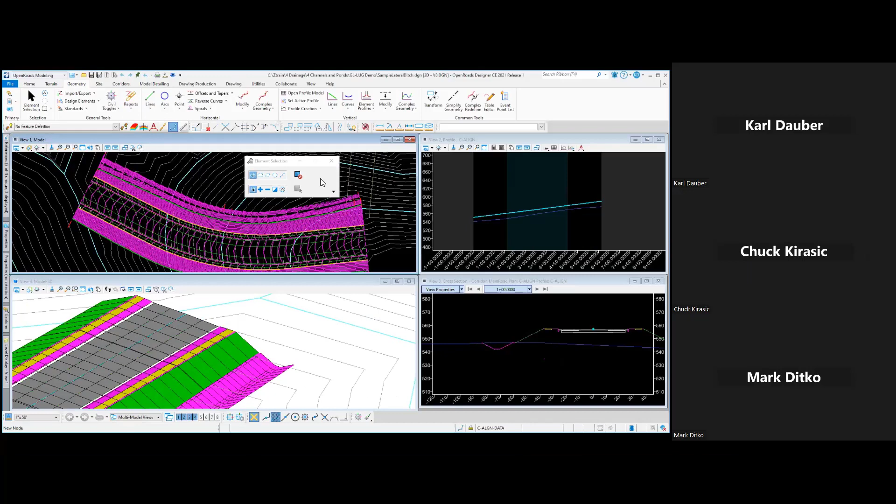And... all right. You see my screen, Chuck? Yes. All right, excellent. All right, I'm going to dive in.

Ditch design, ditch modeling is a big topic. There are a lot of different kinds of ditches and a lot of ditch issues when it comes to modeling. For example, ditch intersection modeling is not something I'm going to be covering at all today. So we're going to look at one specific, although very common type of ditch. I want to refer to these as lateral ditches, ditches that run alongside a roadway fill slope.

And so naturally, these lateral ditches have a relationship with the roadway. And what often happens is the roadway design changes, and then you have to redo your ditch design, and that's frustrating and very time consuming and expensive. And one of the things that we want to leverage in OpenRoads is the ability to develop dependencies or ruled relationships between different civil features.

So for example, we want to create a ditch that has a ruled relationship to the fill slope line, the toe of fill slope for this road, such that when this road design changes, the ditch will move along with it, which will save us a lot of time and energy. You still have to go back, of course, and check that ditch and refine its profile, perhaps, since it will be in a new location, but that's a lot better than starting from scratch.

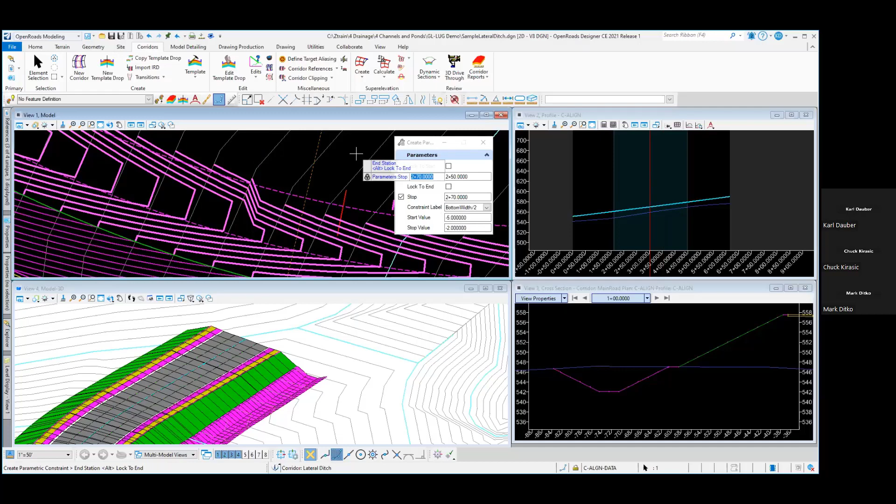And at the end of that, I'll transition back to the original value and accept those inputs.

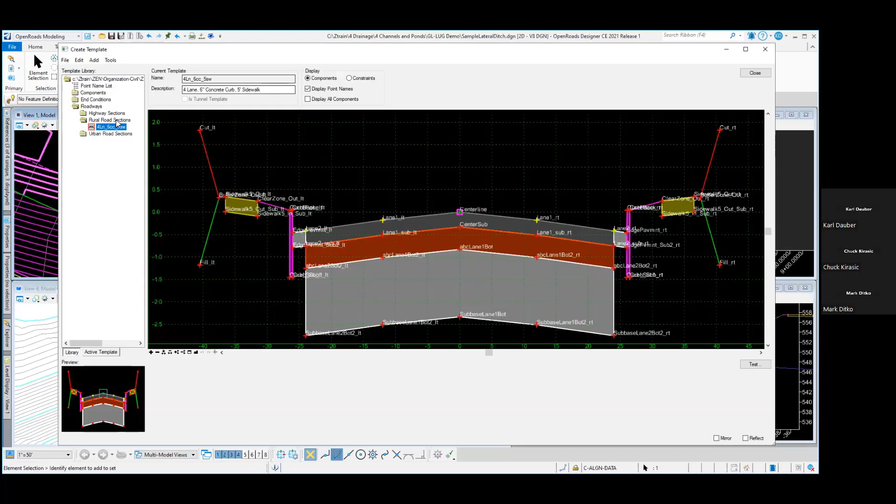That is not the right template library, so I need to go get the right one. Here we go. Now that I have my right template library, I can go ahead and drop in a new template into my ditch corridor.

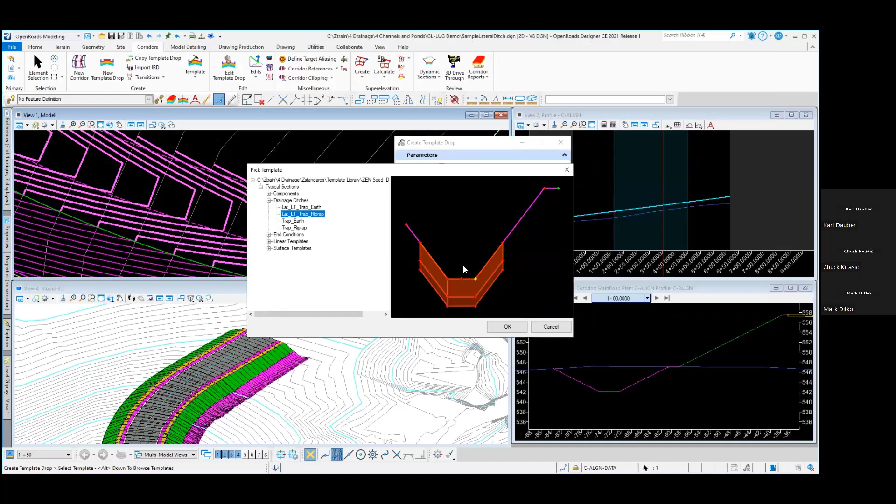Okay, this is pretty simple. You just have to specify the range over which you want to add that template, so from 0 to 250, the drop interval, and what template you want to use. By default, the corridor that was set up was set up with an earth lined section. I'm going to add a riprap section to that last 250 feet.

And accept that, accept all my other inputs. Oh, need to change that back to 0. Come down here and update my cross-section view.

There's the riprap lining. Template for that includes riprap as well as bedding. If I wanted to, using parametric constraints, I could change the thickness of the riprap layer, the thickness of the bedding, the height of the lining, for example. So all of that is something you can come back and revise later.

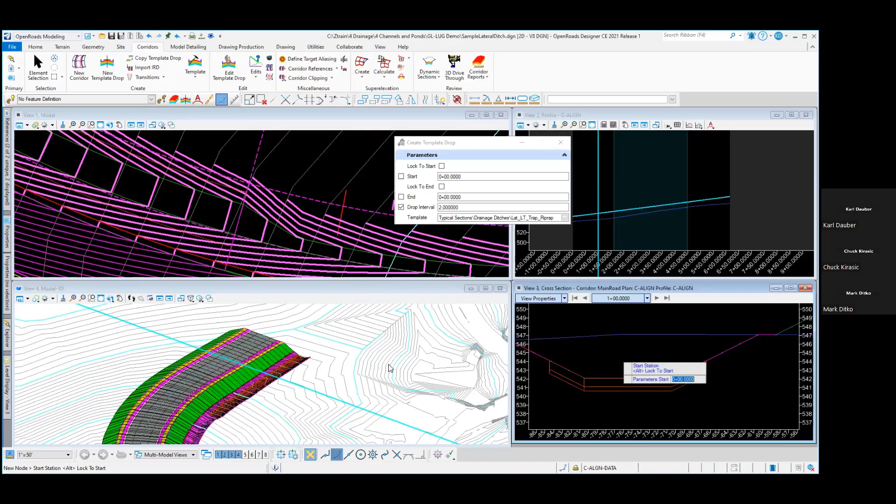You can see the riprap in the 3D view, and in the plan view we have new graphics here showing the limit of the riprap line. And you could use that for patterning if you want for your construction plans. So that's a quick overview of what I want to create and where we want to go.

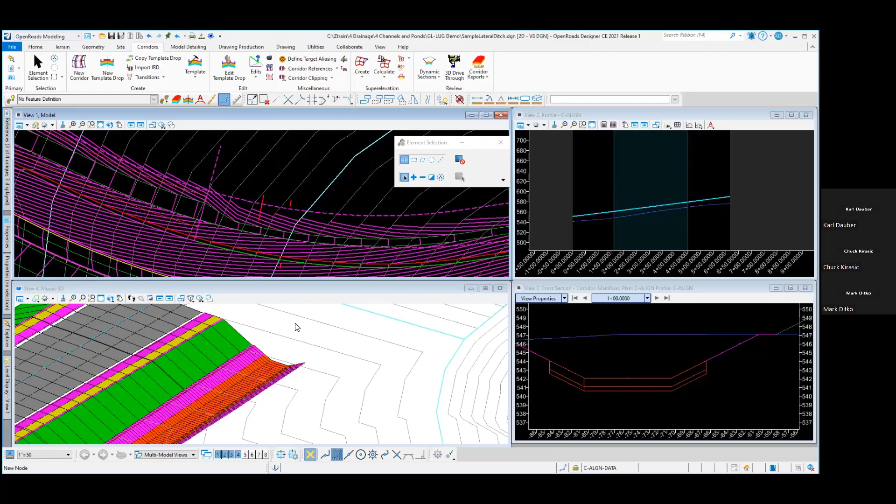So next, I'm going to look at what's needed to do this, and then we'll dive into the actual process of how it's done. So to do corridor modeling, there are some basic things that you need.

Of course, you need a terrain, right? You need an existing terrain so that the back slope of your ditch has something to intersect with. You need your roadway corridor model, of course, and we're going to be tying our ditch to the toe of slope feature from that corridor model. And we need a template library, as you've seen.

So we're going to use our toe slope as the control. We're going to apply a template to it, and that template will intersect with the existing ground. So those are the basics that you need.

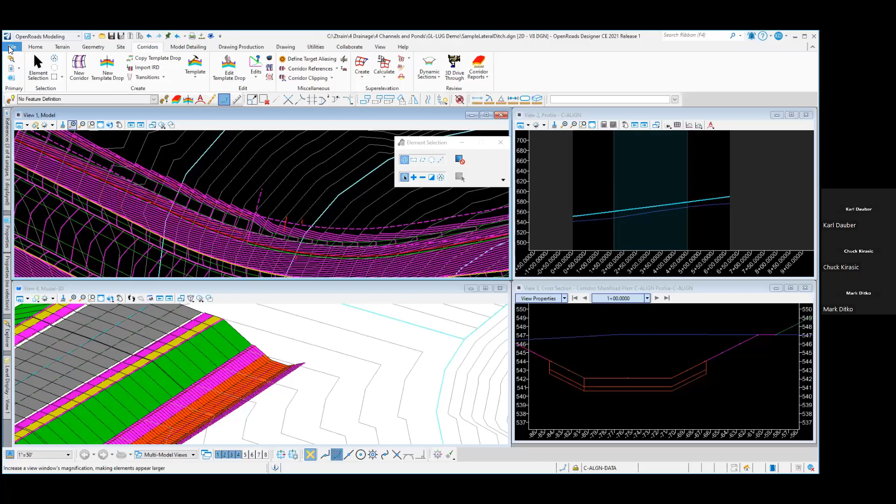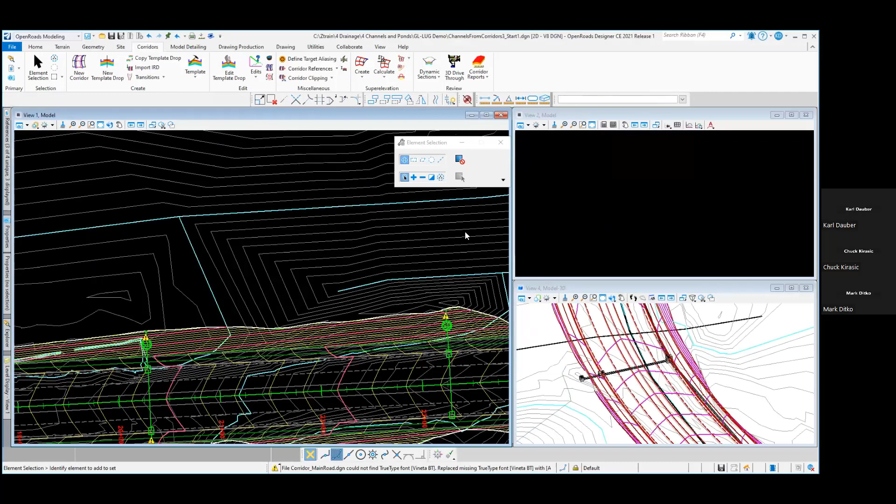All right, I'm going to go ahead and open up a different file. I'm going to show you two different methods of how to do lateral ditch modeling.

Chuck, is this still looking good? You still see all this? I got a message that popped up. I want to make sure we're still good. Yeah, I can see everything.

Okay, thanks. So this is a project example, a road widening project, and we have a proposed roadway corridor that's been run for the widening. You can see the proposed contours and the fill slope. From that, we have some drainage, we have some utilities in here. And I'm going to be creating a lateral ditch that's going to run from this point here all the way down to the stream crossing down here.

Now, the roadway stationing actually runs from left to right, so that'll be the stationing for the ditch as well. So it actually will start here and end up here. So I need to go and make sure that I've got my template library loaded up. It looks good.

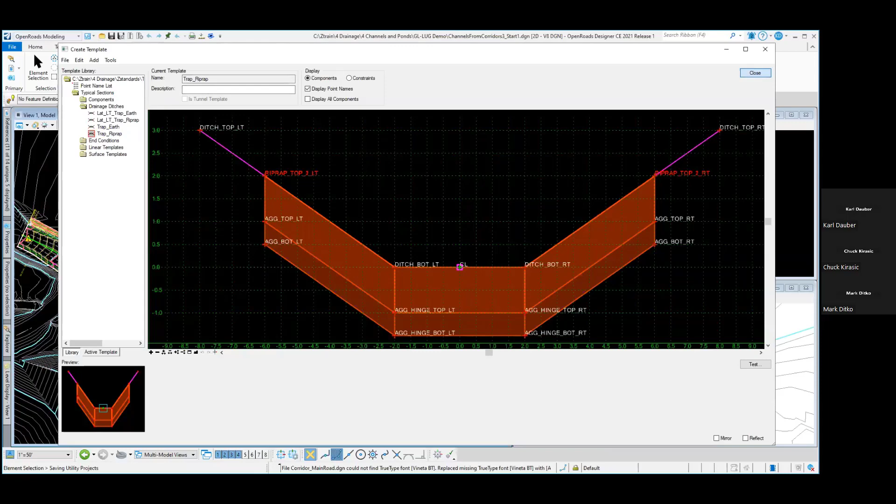Want to make sure that you're in your Open Roads modeling workflow - that's where corridor modeling is done. I'm in the corridors tab, and I'm going to use the tool New Corridor. Look at my tool settings dialog.

I want to set my feature definition. I have some feature definitions available. I'm going to use the final design feature definition that will provide contours, so I'll use that one.

Looking at my prompts here, my first prompt is to locate the corridor baseline - this is the baseline for my ditch corridor. And what I'm going to use as my control is the toe fill slope for the roadway corridor. If I hover over it, look at my attribute feedback, it tells me that feature is called fill underscore left. So that's the name of the feature that comes from the template used for the roadway corridor - that's what I'm going to tie my ditch to.

That's going to become my control line for the ditch, and that's very important. I'm going to be coming back to that again in a little bit. So I'm going to go ahead and select that.

The next prompt is to locate the profile, or reset for active profile. Now that toe of slope feature was generated from the roadway corridor, so it has not only a horizontal aspect to it, but it also has its own profile.

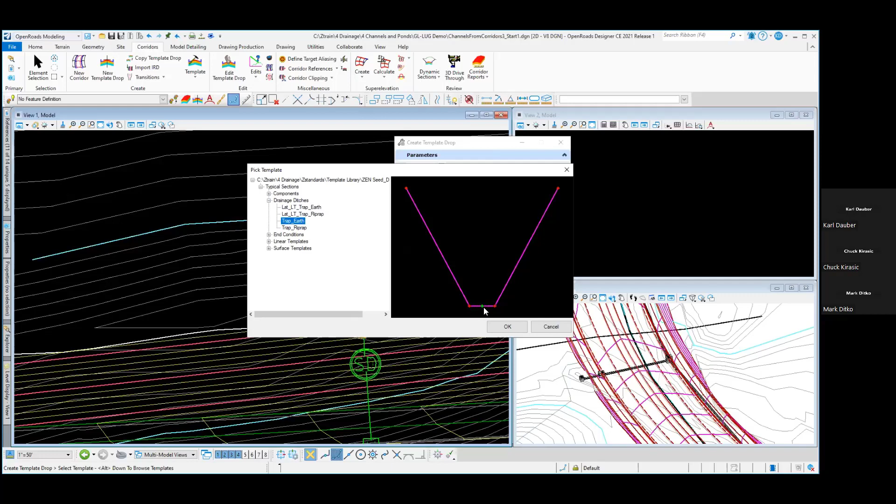I'm going to go ahead and select that one, and then data point to confirm that selection. Now I need to identify the start and end point of my ditch.

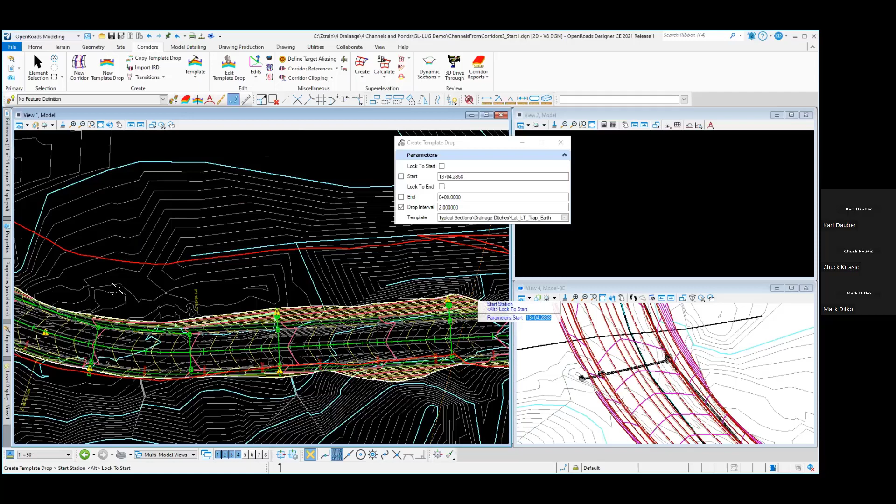Remember that, again, I'm using my control line as the toe slope feature for the roadway. So I'm going to start down here. I could identify this graphically by just clicking on a point, but I know the actual stations that I want to use is around 333.

I'm going to press enter to lock that value in. You see I've got a lock symbol in my heads up prompt and a data point to accept that value. Next prompt is to end the station.

I'm going to end it up here at around station 1270. Press enter to lock that value and then data point to accept it.

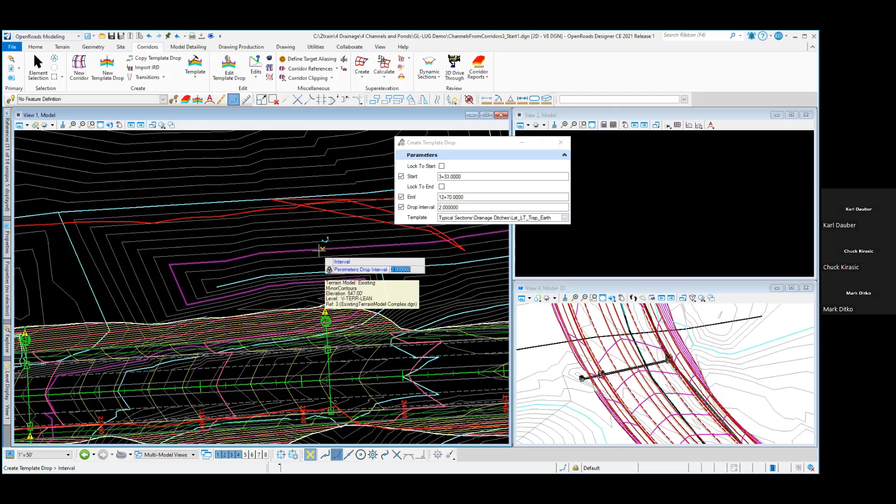Last prompt is for the template drop interval. This is a critical parameter for corridor modeling in general. When you're working on miles of roadway, it's something you have to give a lot of thought to. How many template drops do you really need and want? It really affects your processing time, speed, and file size.

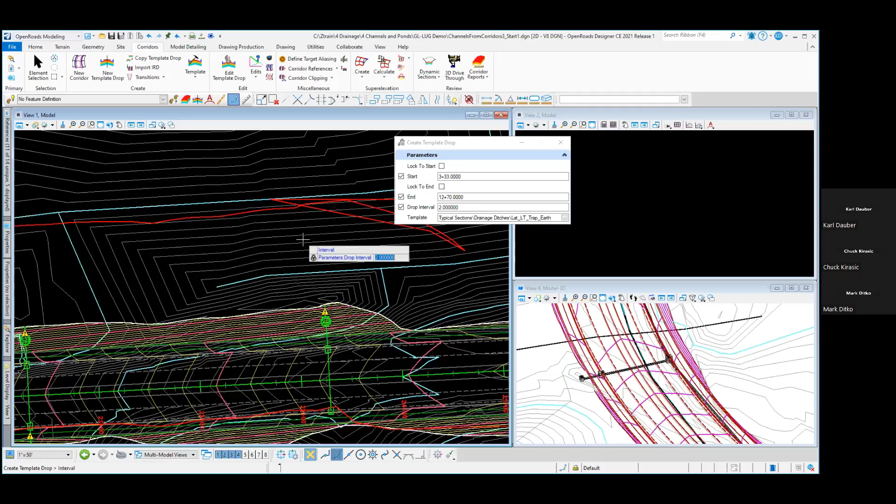For ditches, these are relatively small corridor models, so I use a rather tight interval. So I'm going to go ahead and use 2 feet. And once I do that, that's the last input. And go ahead and exit the process.

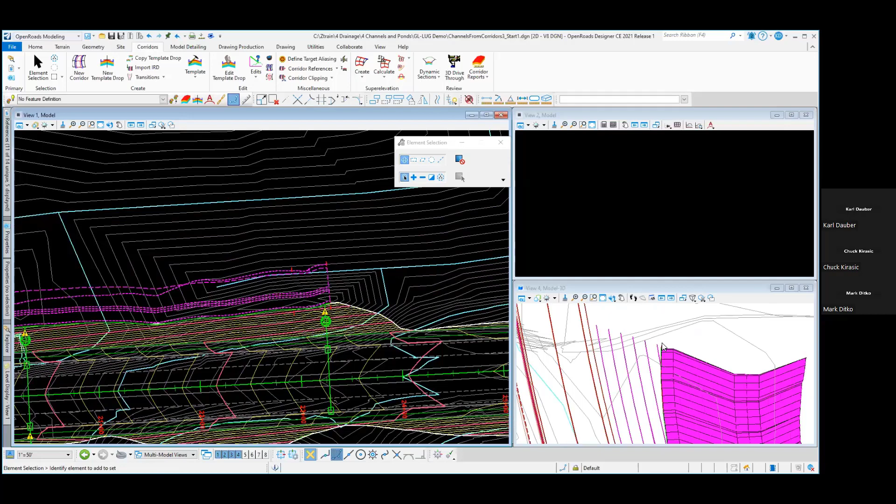You can see I now have a ditch corridor in my file. You see I have it in my 3D model. And my ditch corridor is now tied to the toe slope of the roadway corridor model.

I'm going to go to my references. I'm going to turn on display of my 3D model. And I'm going to turn off some levels as well. I'm going to turn off display.

I want to turn on display for the 3D model so I can see those contour lines, but there's a lot of other stuff I don't want to see. So I'm going to turn off display of that level, and I'll turn off the template drops and clean that up a little bit. So now you can see the contours for the ditch.

Notice I've got this sketchiness that's going on here with these contours. The reason that's happening is that I have crossing templates.

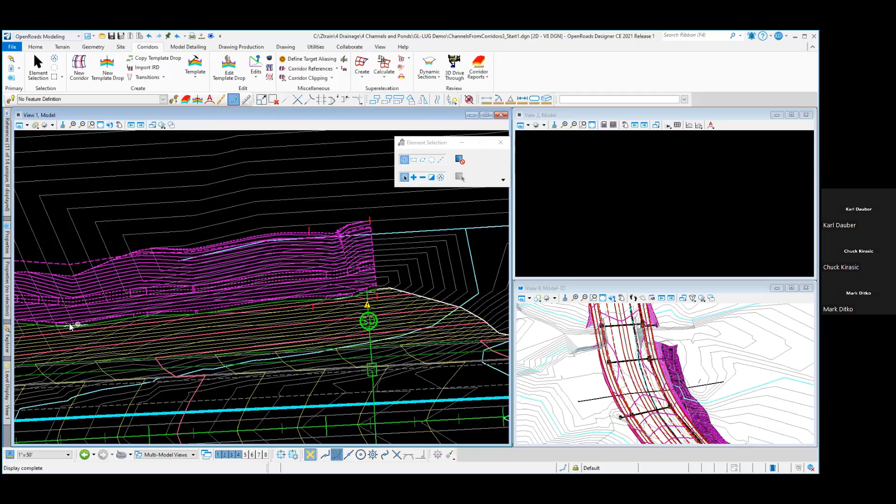This method that I'm showing you, using your toe slope feature for laying out a ditch, it works really well if that toe slope feature is smooth and doesn't have a lot of deflection in it. If it does have deflection, then you can end up with crossing templates, and that will happen.

One way to get around this, and I'm not going to demonstrate it, just letting you know, is to lay out using geometry an independent horizontal alignment along your toe slope. You can then drape that horizontal alignment on the existing ground to create a vertical for it. Now you'll have a horizontal and vertical alignment which you can use for your ditch. The difference is that now you have control, and you can add a horizontal curve, move the PI points in and out to smooth it out.

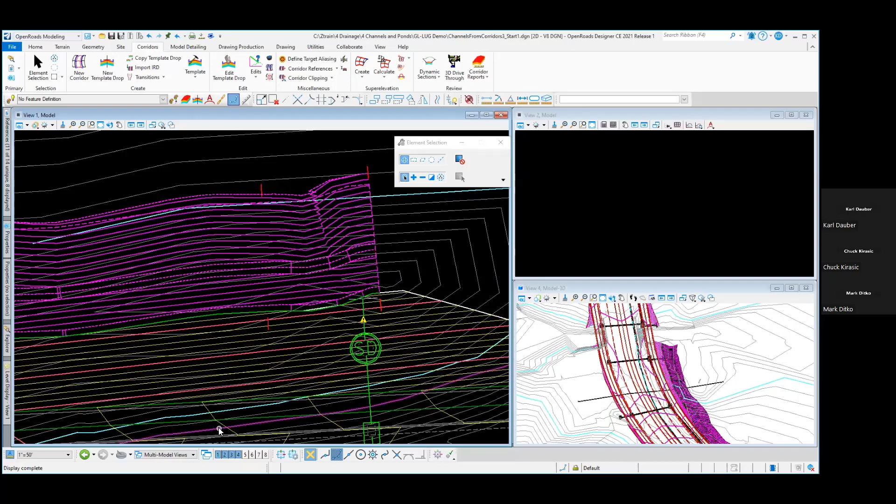That will resolve your crossing templates issue. Now I'm going to create a dynamic cross-section view. It's important that we have that whenever we're working with corridors, so we can see how things look in cross-section. You can do that from the ribbon menu, or right from the corridor model itself. Put that down here in window 3.

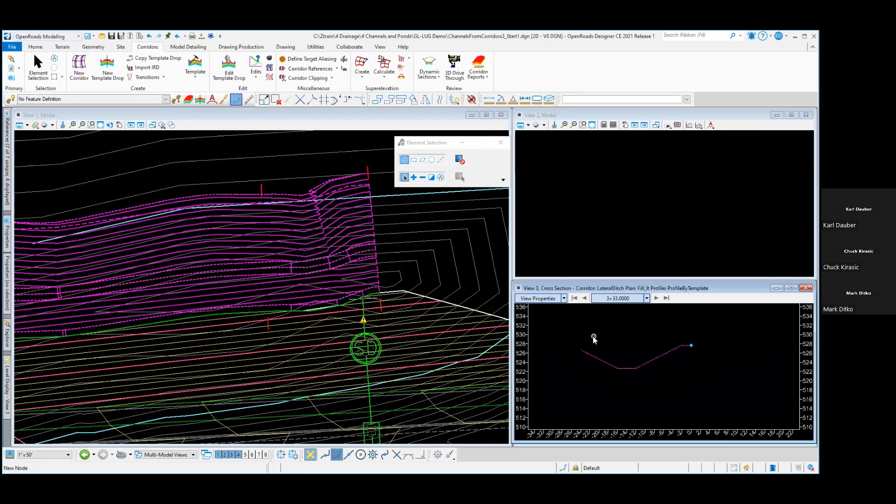I'm not seeing a whole lot there. Normally a cross-section view cuts through everything in your 3D model. I just need to make sure I've got levels turned on that I need. There's a few that are not turned on, so let me go turn them on. And my terrain, I want to see my terrain. Now I see what I want to be able to see.

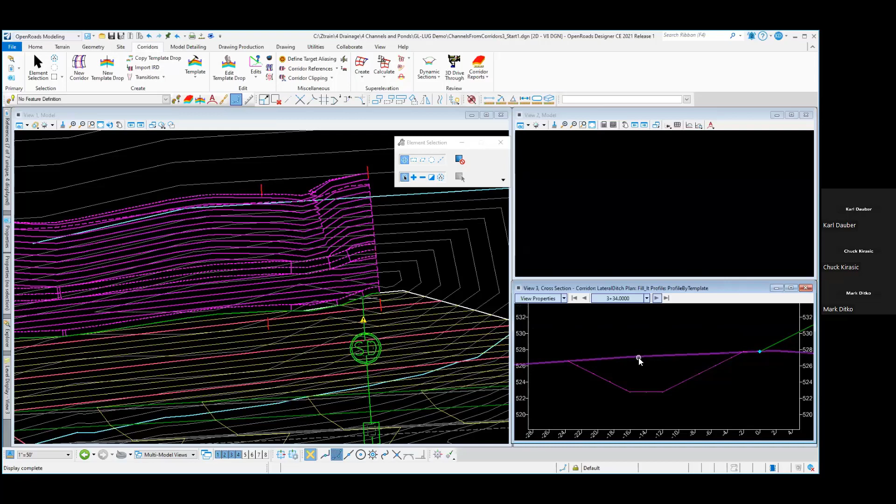Notice when I'm using this arrow, it by default comes back and shows you the ditch corridor model that the cross-section was set up to see. I would like to be able to see all these other things too. You can come over to view properties and say center on current offsets, and then as you move up and down through the corridor it won't keep changing on you. See what I've got in here: my pavement layers from my roadway corridor model, my existing ground, and I even have some existing utilities showing. So whatever you've got attached as part of your 3D model will show up here in your cross-section view if you have the levels turned on. I'm going to leave that there so you can see the changes as we go along.

Next thing I want to do is create a profile for this, so I'm going to open up a profile model. Let me go back and turn off display. Oh, I've got to activate my plan view first. All right, turn off display of my 3D model. That'll clean things up a little bit.

I want to create a profile model for my ditch center line. This is the ditch center line that was created by the ditch corridor I made, so I'm going to select that, go to open profile model, and put it over here in view number 2. So there is the profile of the center line of the ditch.

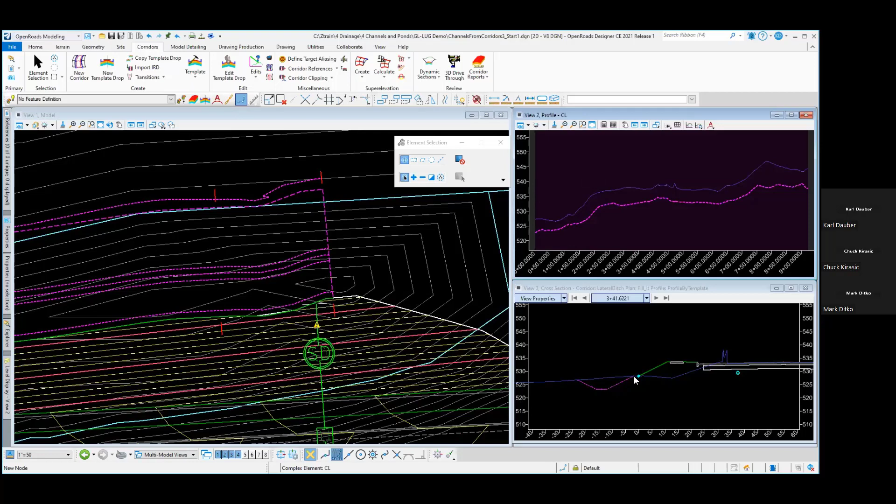And that's not a very good profile, is it? Why does it look like that? Well, what we did was apply a ditch template, and that ditch template is tied to the roadway fill slope. And that roadway fill slope goes up and down all over the place as it intersects with existing ground, so it's not a smooth downward slope at all—it goes all over the place.

We need to apply a profile to this ditch, an independent profile, so that it drains in a downward direction the whole way. We need to eliminate these low points and high points that we have, and we're going to do that using something called a point control. What a point control does in corridor models is override a point in your template.

In this example, this template works from right to left. It starts here and works out a certain specified bench width, goes down at a certain slope for a certain distance, goes over to the left for the bottom width, and then goes up at a specified slope until it intersects with existing ground.

We want to override the elevation of this point. Instead of this point being a fixed distance below the top of the fill slope, we want it to float, following a profile that we specify, while maintaining this fill slope. So this ditch will float in and out, the horizontal location adjusting as necessary to maintain that fill slope when it intersects the elevation from a profile we are now going to create.

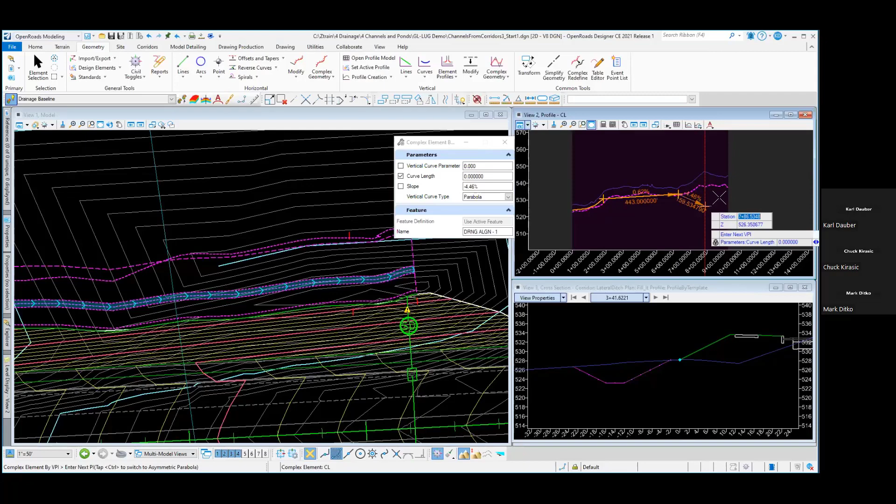184. 530.72. Accept. 627. 533.47. And last one, I will snap to the end, lock that station value, and then specify the elevation, which is 542. Data point to accept, reset to end the process, and escape.

So there is the profile that I've created. This is a temporary profile. I'm going to use this profile for my point controls. Done with Civil AccuDraw, I can turn that off. I can go ahead and put my persist snaps toggle back on.

Now, I want to explain something, and this is what causes a lot of problems for ditch modeling that sometimes people have a hard time understanding. So I'll spend a little bit of time on this. There are 3 different baselines that you need to understand that are going on here. One is the roadway baseline, right? We have the horizontal alignment for the roadway. We also have a toe slope feature.

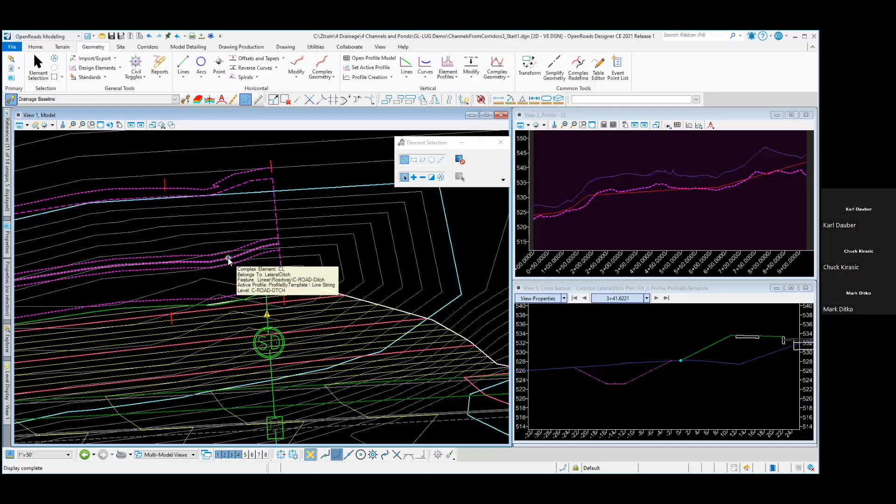And that feature has its own baseline. It does not run during the entire length of the roadway. It starts and stops in different locations, and so it has its own station base. And then finally, we have the ditch center line itself, and that also has its own baseline. So the stationing for your ditch center line is not the same as the stationing for your toe slope feature, which is not the same as the stationing for your roadway. It's 3 different things, and it's easy to get them confused.

The point that I want to really emphasize here is that when we created this ditch corridor model, we selected our toe slope feature as the baseline. So as far as any edits that we want to make with this ditch corridor model, and when we have to specify stationing, it's the stationing of this toe slope feature that we need to use, because that is the control for the ditch. It's not the stationing for the ditch center line.

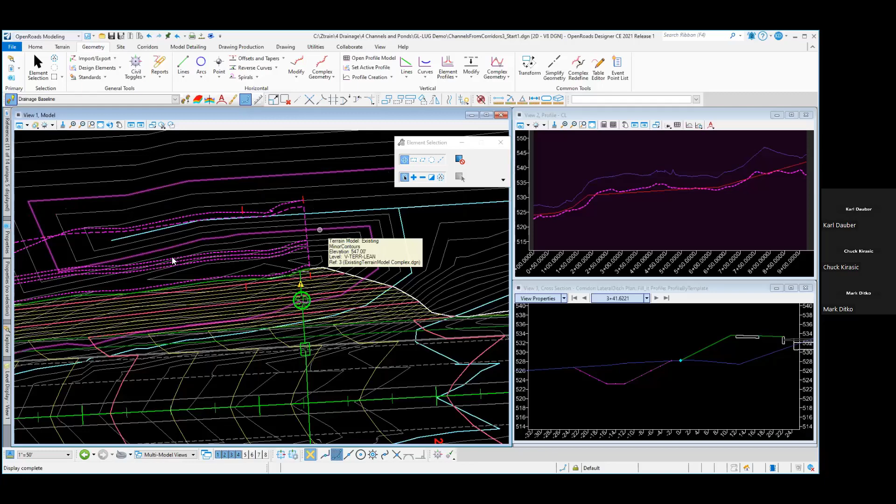When we specify parametric constraints, when we specify point controls, all those stations are in reference to the toe of fill slope. And then later, once this is established, we can come back and use a tool that will give us the roadway baseline and offset for different PI points along here. So I just wanted to make that clear, because that's a point of confusion that often trips people up.

All right, so I've now created a profile. I would like my ditch to follow this profile, not this crazy profile here. And so I'm going to use this information to create point controls. Now I've just said that I can't use the station base. Notice that this profile is the center line. This is a profile along the ditch center line, and so this starts at station 0. But the ditch corridor actually starts at station 333 based on the stationing of the toe slope lines.

So I need to convert. I need to know what the stations of these PI points are according to the stationing of the fill slope line, not the stationing here. So the tool that I'm going to use is the Analyze Point tool, and that will allow me to convert the stationing. So the prompt here is select element to analyze point. It's asking me for the baseline. What baseline do I want to use to analyze point?

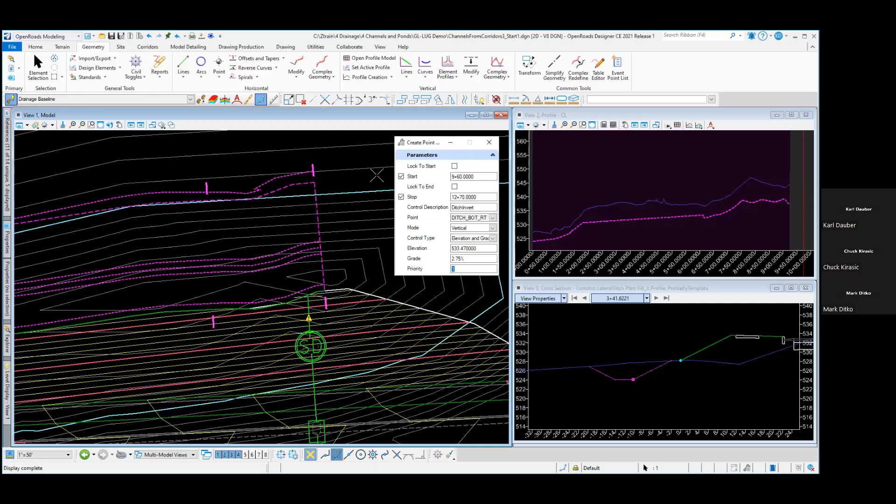Next one. See, this is 526.58. Accept the inputs. Next one. Just this one and one more to go. And then one more. All right, there it is.

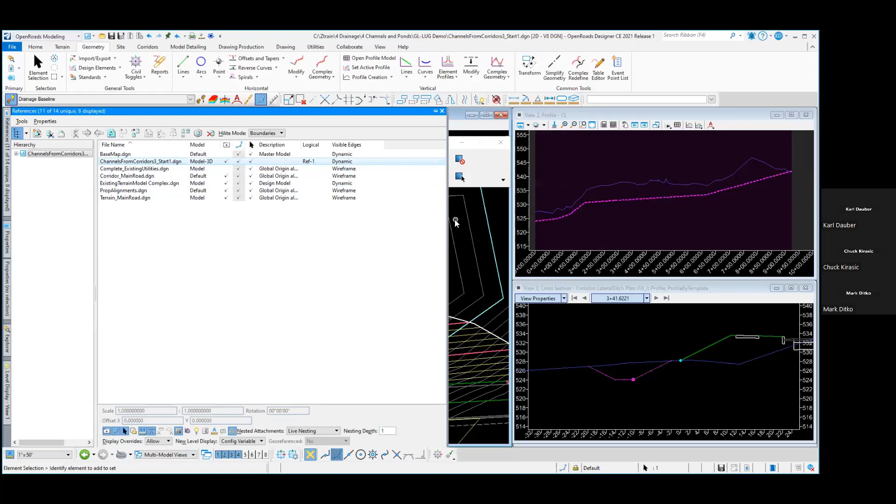So I've now revised the profile of the ditch corridor using point controls. Now we've eliminated all those high points and low points. Go ahead and turn off display of my 3D model reference. Let's see, that's already off. Oh, I think I want to turn that on. There we go. Go ahead and turn that on. It's the 2D view that I want to change.

And in the 3D view, turn off everything but the contours. And now I've got a grading plan. So there are my proposed contours from my ditch. Now it looks like it should. No high points and low points all the way down to the end.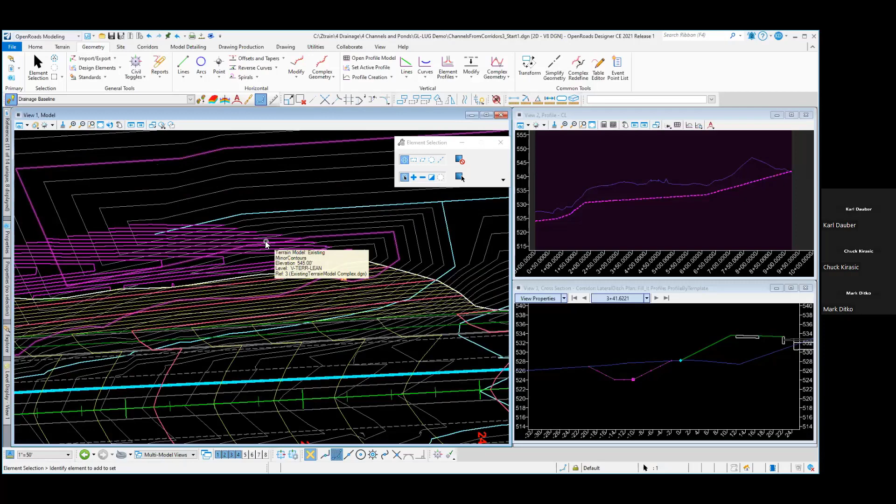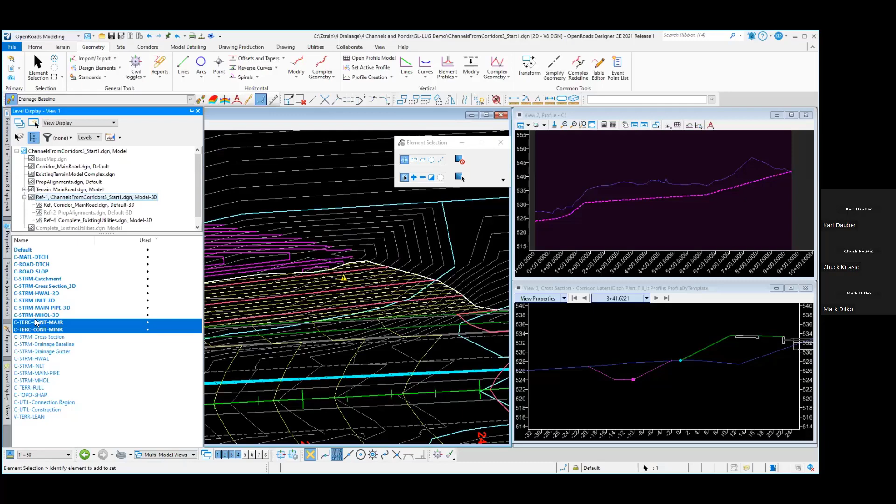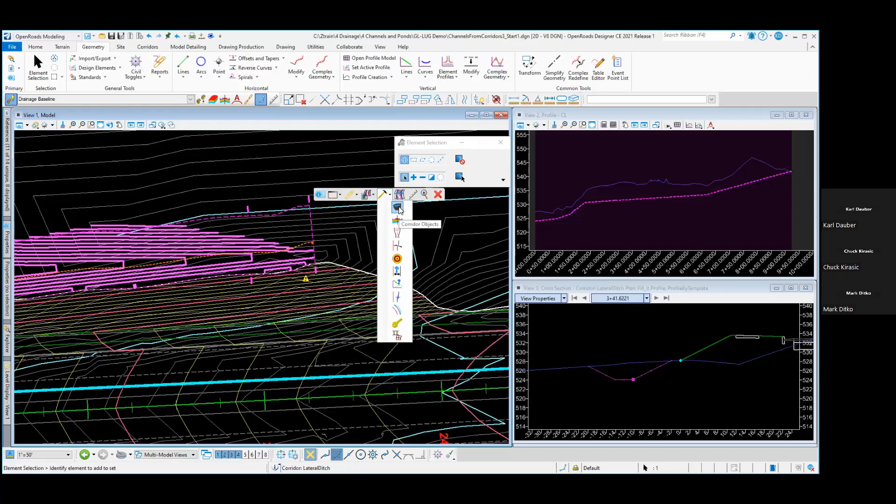I'm going to go back here and turn on the level that has my graphics, my OpenRoads graphics, so I can work with my design, these handles. And I want to show you this one tool under corridor creation tools. It's called the corridor objects tool, or as we like to call it, the bucket list. If you open this up, this is a one-stop shopping. It shows you everything that's in your corridor model.

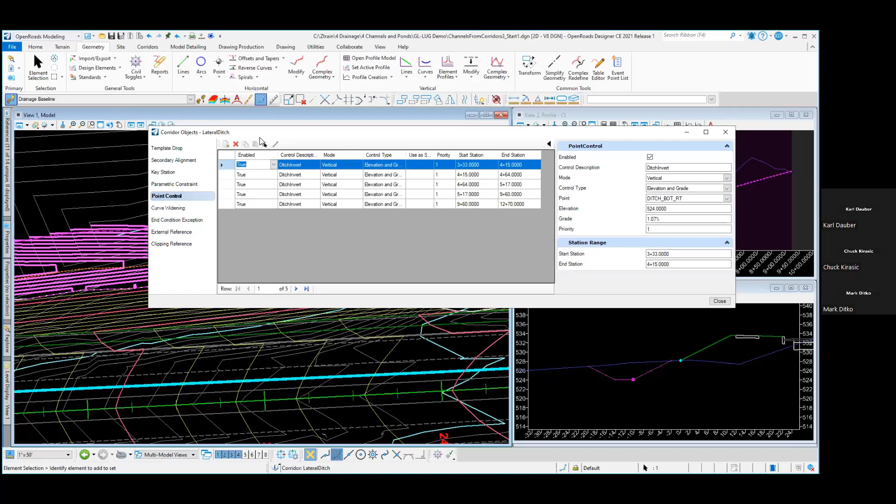The template drop that you used, which you can then go in here and change if you want. Parametric constraints, if you've used any to change dimensions. Here are the point controls that I just put in. All right. If I want to, I can use this tool to change that very last slope. I can come in here and monkey with this if I want. I can change that slope to 2%. All right, you see that the profile updated and the grading updated as well.

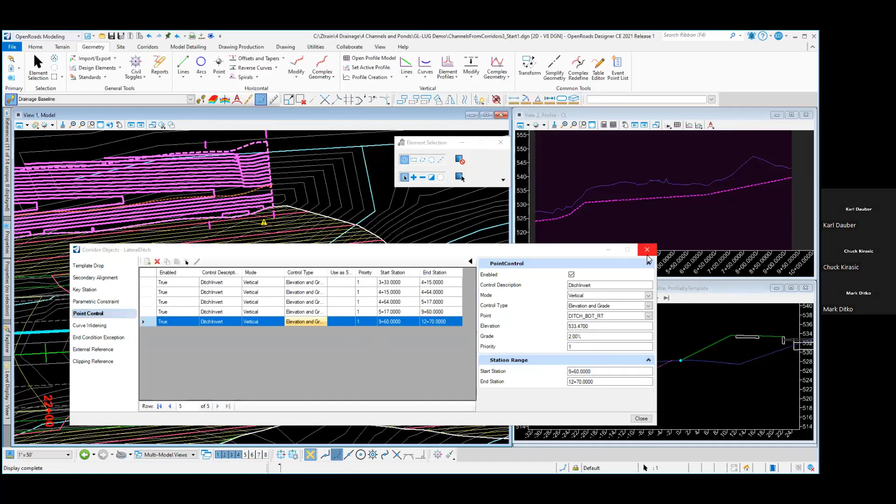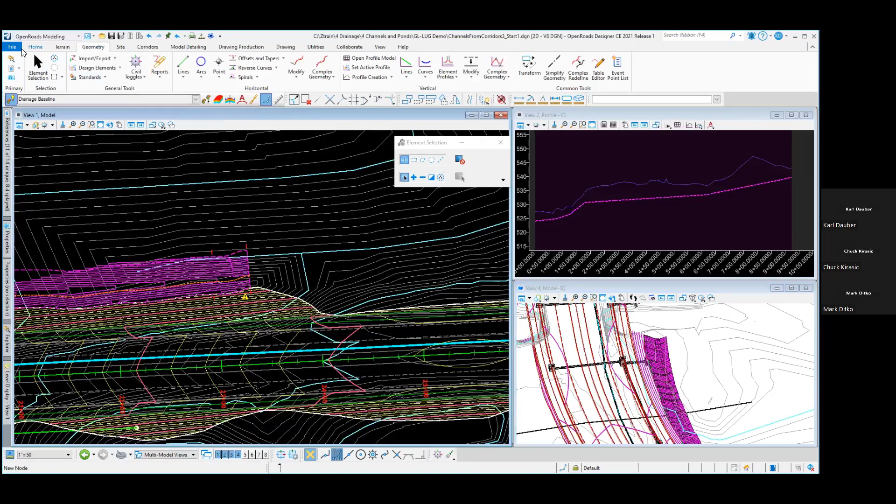I can look at my 3D model view. All right, so that's method one for how to apply a point control to come up with your independent ditch profile. I want to show you a second way of doing this. I prefer the second method. Go ahead and close this file. And the second file is the same project. Just going to pick it up where we left off before we applied the point control, so I can show you a different method of using point control.

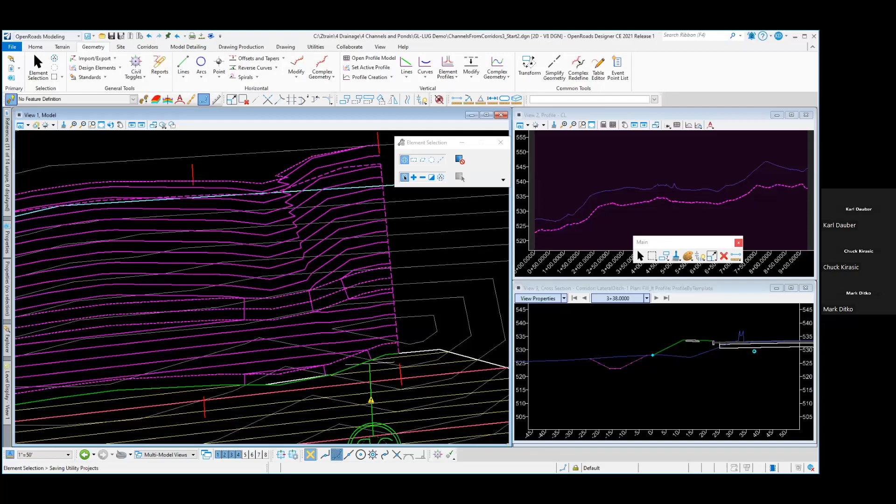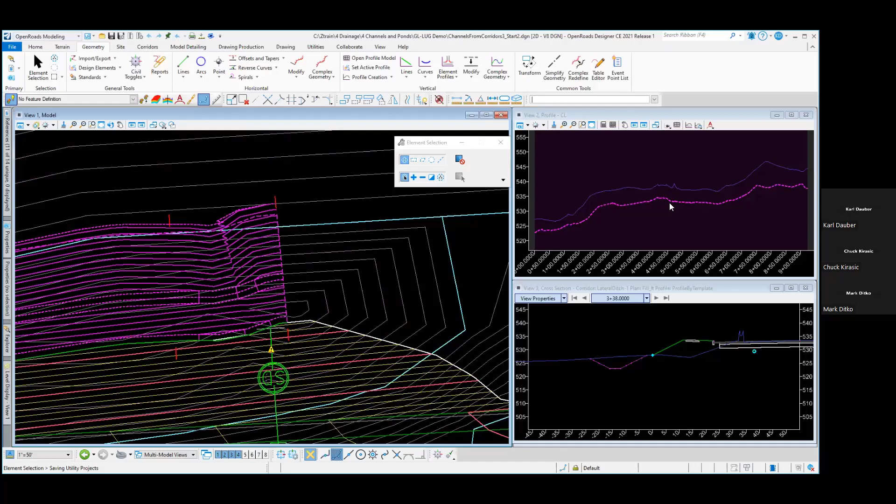Okay. So this is where we left off when we had just created the ditch corridor model, and we have the default template that we specified following the profile. So now we want to use a point control to enter in a good profile. So I'm going to use the information that I had from last time. I'm going to turn off my persist snaps just like before. To clean up this view a little bit, I'm going to turn off display of the 3D model.

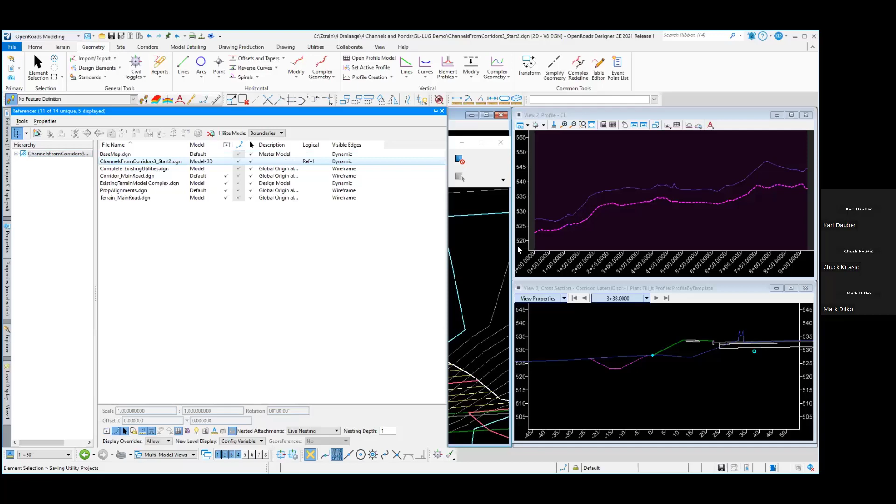And what I'm going to do is create a horizontal alignment along my ditch center line, and then I'm going to give it the profile that I want. And then I'm going to use that linear geometry as my point control rather than profile and grade. So I'm in the geometry tab under horizontal tools. First, let me set my default feature definition. All right. And complex by PI. Make sure my radius is set to 0.

And I'll start at the downstream end and work my way up. Now at this point, laying out this horizontal alignment, I'm going to roughly lay it along the ditch center line, but I don't really need to take care too much exactly where it is. It doesn't matter, because when I apply the point control, this ditch is going to shift anyway. So I'm just going to roughly lay this in.

It is important, however, that you make sure that you have your persist snaps and rule turned off. The reason why that's important is that I'm going to use this linear geometry to make a modification to my ditch corridor model. And it is a rule in OpenRoads that you cannot use a feature of a corridor model to make modifications to that same corridor model.

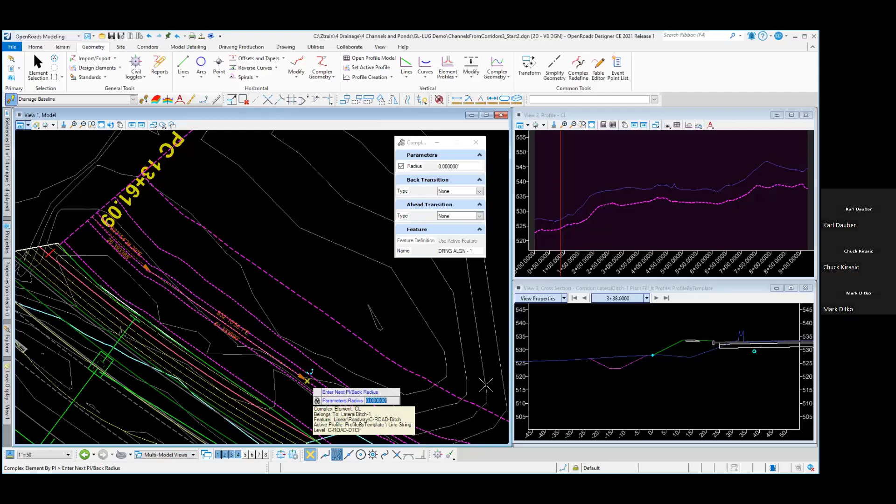Along the ditch center line. It's not terribly important, really, how accurately you lay this out. And I'm not seeing it because that level is off. There we go. So there's the horizontal alignment that I just created.

Now I want to create a profile model for that horizontal alignment. I've got a horizontal alignment. I need to give it a profile. I'm going to select it, go to open profile model. I'm going to put that in window number 5.

All right, so what do I have here? I've just cut a profile along this horizontal alignment that I created. And that's what OpenRoads will give you. It will show you a cut through your active terrain. I would like to see other information in there. I would like to see what's going on with that ditch corridor model that I created.

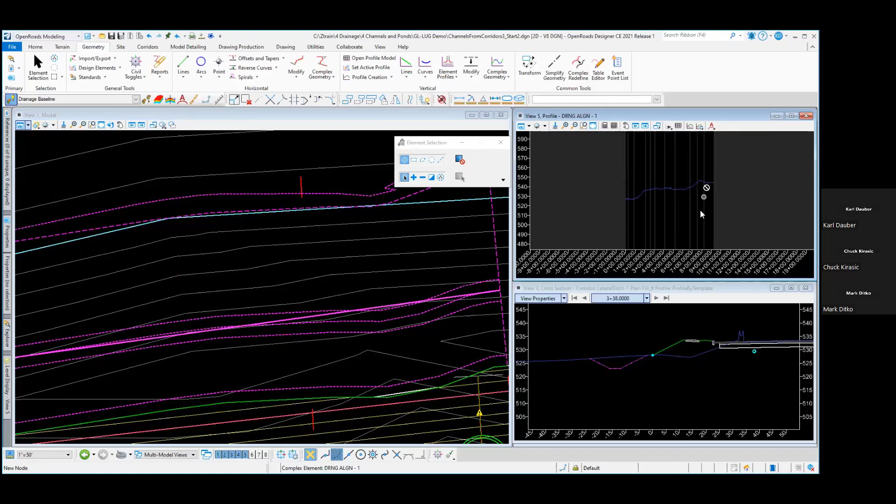And the way to do that: your cross-section view automatically, dynamically shows you everything that's in your 3D model. That's not the case with your profile. If you want to see information from your 3D model in your profile, you need to create what's called a 3D cut. So there's the tool right there, create 3D cut. I'm going to select the method using corners, specify the upper left, lower right corner.

And now it cuts through the 3D model, and I can see here's my profile for the ditch that I have. And it's actually also cutting through a utility that's out there. Unlike the cross-section viewer, this is not dynamic. This is a cached graphic. It's static. It just slices through the 3D model at that moment in time. So if your 3D model changes, you'll then need to use this tool, refresh 3D cut, to refresh that view.

And so I'm going to go ahead now and lay out some geometry for this horizontal alignment. Okay, this is the profile of my horizontal alignment called Drainage Align 1. We'll use that same tool that I used before. Profile complex by PI. Got my persist snaps turned off. My vertical curve parameters are 0. Okay, go ahead and lay that in.

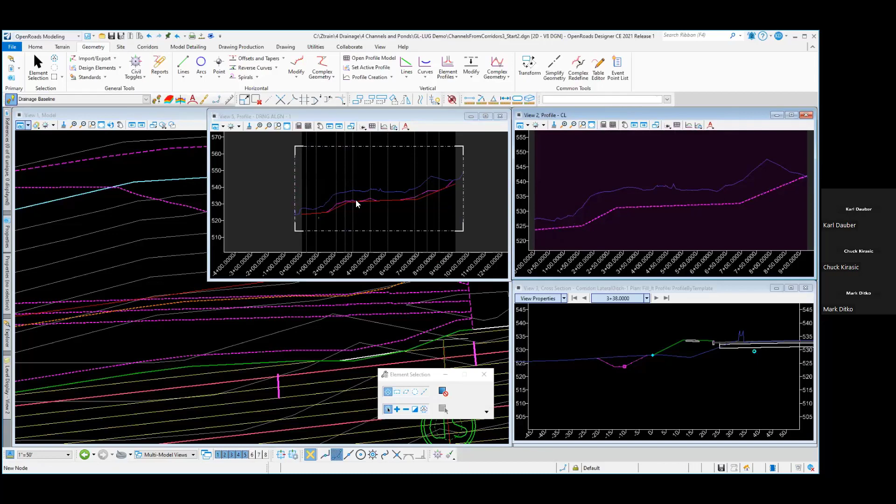If this bothers you, that they're not in the same place, then what you can do is come in here and just make some adjustments to the horizontal location of the geometry that you created for control. You can grab that point, move it down here, and do that all along the alignment. And again, this doesn't have to be perfect. You're just making this a little closer than it was in the first shot.

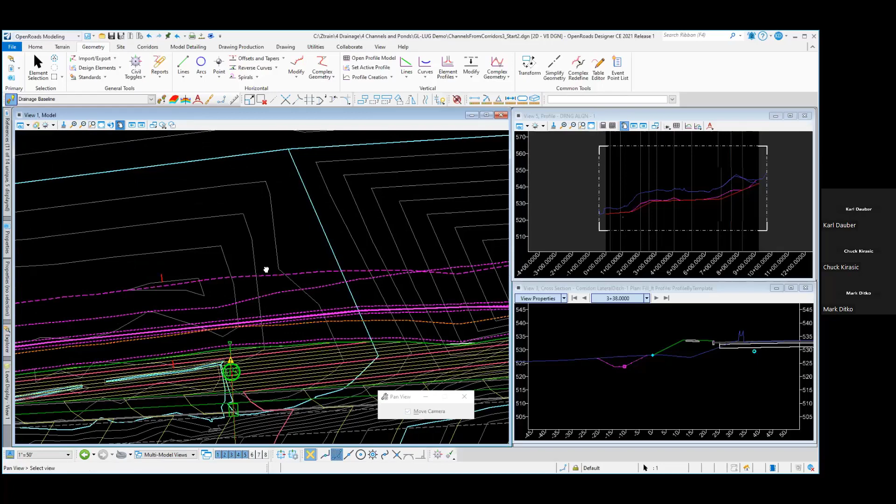And this isn't even strictly necessary. I mean, you saw how that profile came out just fine. But I'll go in here and I'll make these changes just so you can see that they'll match.

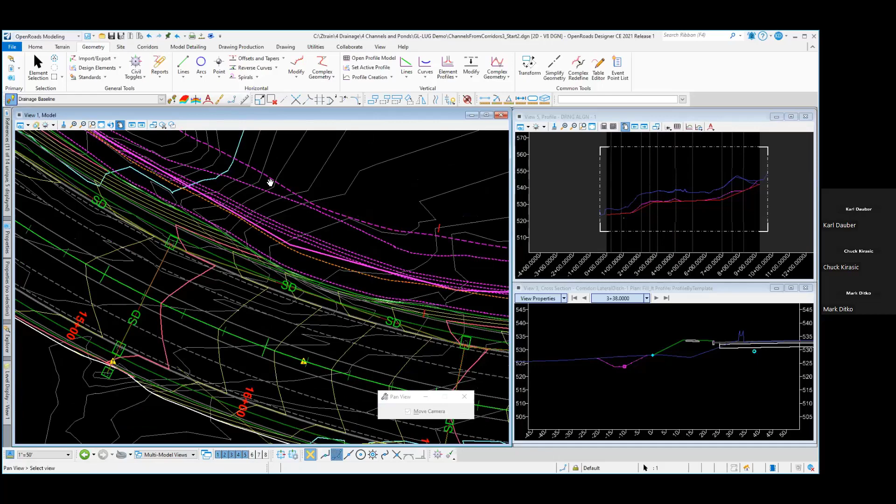Now that's pretty close. It's reasonably close. The geometry is following the new location of the ditch. Not exact, doesn't have to be. So I'll come over here, view window 5 again, refresh my 3D cut. Now you can see it's pretty close. Okay.

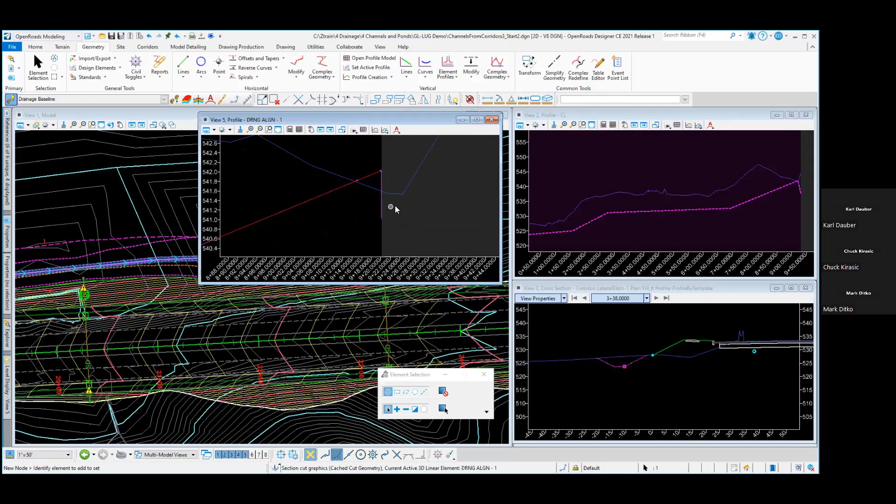Notice that I have a problem at the end here. And that's because with the changes I've made, the length of the profile here no longer ends at the length, because the ditch is changed. I need to come in here and just resnap my endpoint to the end of the ditch. There we go. And now that fixes that little problem. And do a last refresh.

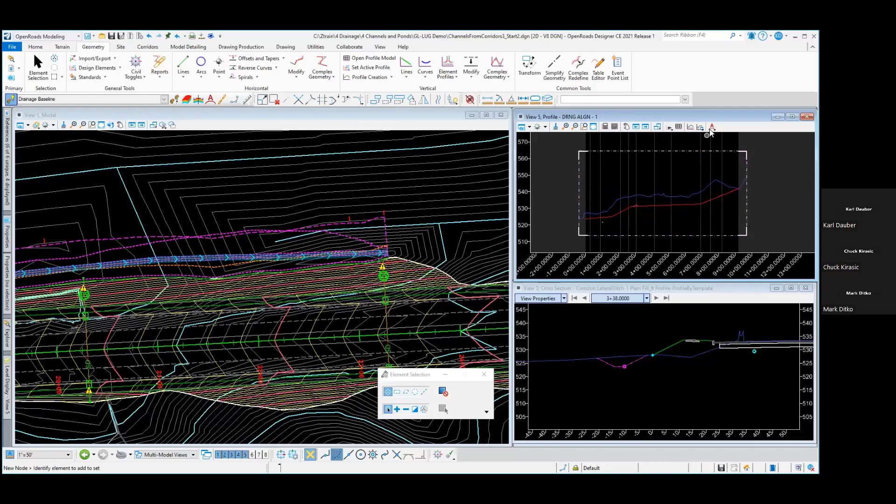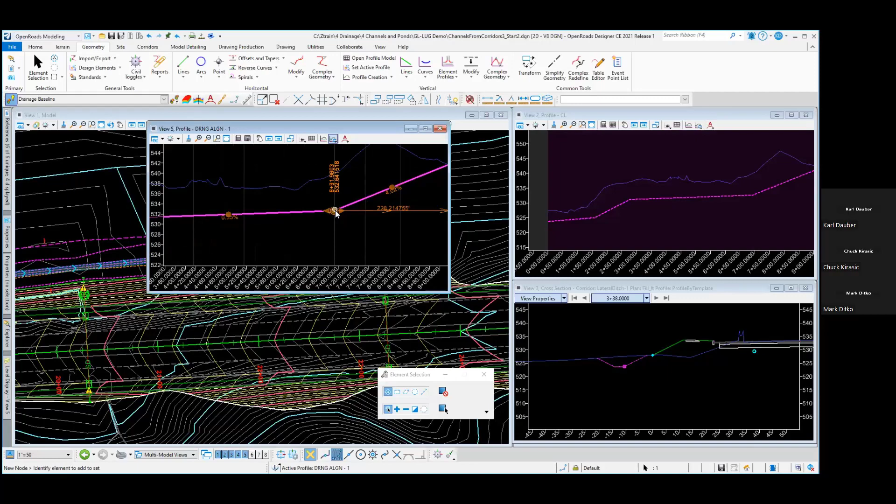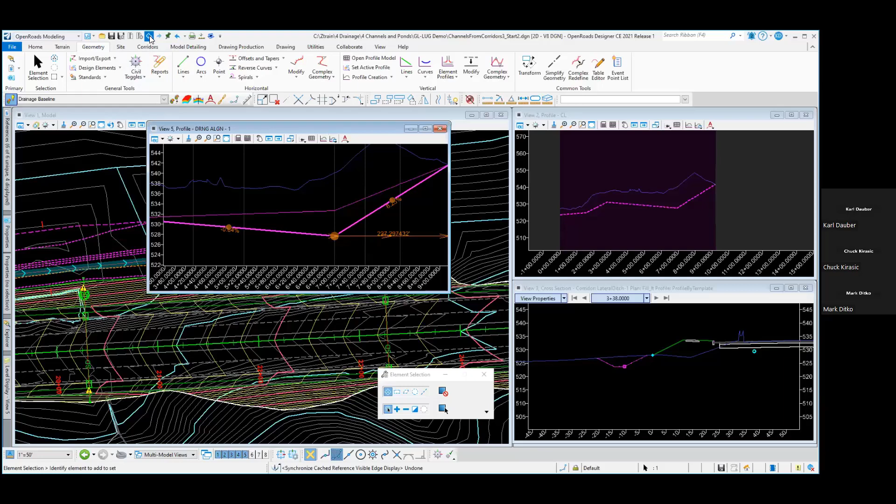If you want to make changes to your ditch profile, this is your control. So you can go ahead and make changes here. For example, you want to change this elevation, and you'll see that reflected in the actual ditch profile itself. Okay. So this is, I think, an easier way of controlling your ditch profile, by laying out some geometry like that rather than using elevation and grade. So those are two different ways.